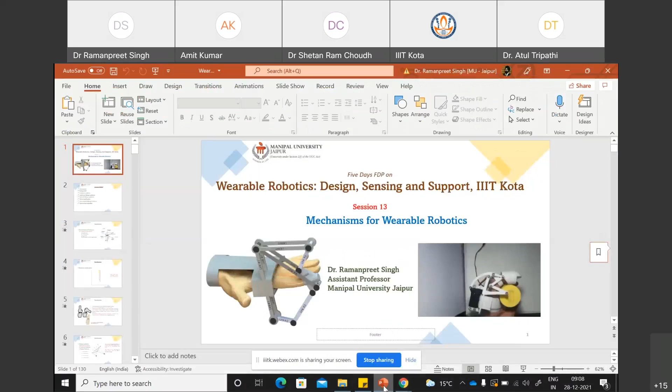Okay, so I think that we are on the fifth day of the wearable robotics design, sensing and support workshop at Triple IT Kota, and if I'm not wrong, this is session number 13.

Before I begin this presentation, I just wanted to share a quote with you guys, because I was reading a book yesterday and I found the quote very touching. So I thought, why not share it with everyone? It may be useful or helpful for you. The quote is like, the tragedy of life is not death, but what we let die inside of us while we live. I found this quote very touching, so I thought of sharing it with you guys.

Okay, so keeping all that aside, I think I should begin now with my presentation. As Dr. Amit has clearly introduced my area of interest, you might be knowing that I'll be going to talk for the next 2 hours or so. I try to maintain the level of this presentation to elementary, and maybe we'll talk about some intermediate and advanced level also, but we'll begin with the elementary level. I hope everyone will be in sync with me during this presentation, and if you guys face any difficulty while I am delivering the talk, you are free to intervene in between.

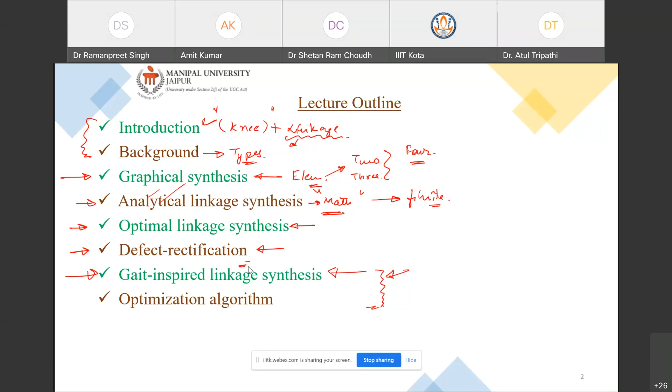Based on time, these two topics, I think, if I get time, I'll try to touch upon them, else we'll stop here. Okay, so I think now I have given you the introduction of what we are going to study in the coming 2 hours.

We'll begin with the introduction. Since our presentation in this lecture is limited to the design of wearable robotics, and my major work is related to the lower limb, specifically the knee, it is very important to understand the biomechanics of the knee joint.

Comprehension of biomechanics is the utmost important thing you should be doing. When I say biomechanics of the knee joint, you must be very clear which plane you are working in. There are three planes: motion can happen in the sagittal plane, transverse plane, and frontal plane.

When I say sagittal plane, it is the plane that divides the human body, or any body, into right and left halves. Any motion happening in that plane is called sagittal plane motion.

My work is restricted to flexion extension motion. Later on I'll tell you what flexion extension motion is. I have not considered internal and external rotation of the knee, or abduction and adduction motions, which happen in the frontal and transverse planes. So my work is limited to this only.

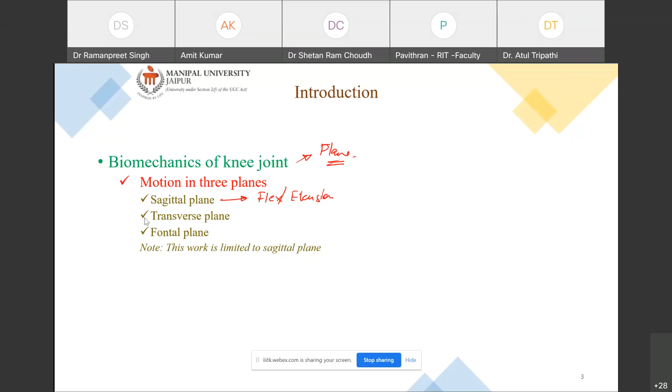I hope I am very clear with the plane description. So this presentation is basically limited to the sagittal plane, and these are the three planes, as you can see.

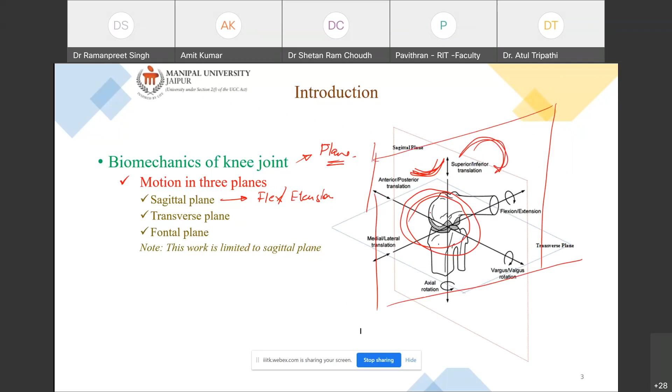This is the sagittal plane, so any motion happening in this plane is your sagittal plane motion. Any motion happening in this plane is your transverse plane motion. And any motion happening in this plane is your frontal plane motion. I hope motion in the three planes is very much clear.

Now I'll show you what kind of motion I was talking about earlier. Suppose this is some wearable device, and we want to visualize what kind of motion is known as flexion extension motion. I'll play an animation so you get a good idea. As you can see, this is flexion, and this is extension. When it moves in this direction, it is flexion, and when it comes back, it is extension.

The entire work will be focused on this, whether I show you slides related to the lower limb or slides related to the finger exoskeleton—whatever body part we are considering, the motion will be limited to the sagittal plane only.

The knee joint allows a wide range of motion for flexion and extension, and this range of motion is pretty significant, which is why I chose this. It is worth understanding the functioning of the knee joint in the sagittal plane—not just what flexion and extension motion is, but how the knee behaves and functions when moving in the sagittal plane. This is equally important. The key motions in the sagittal plane are rolling and gliding.

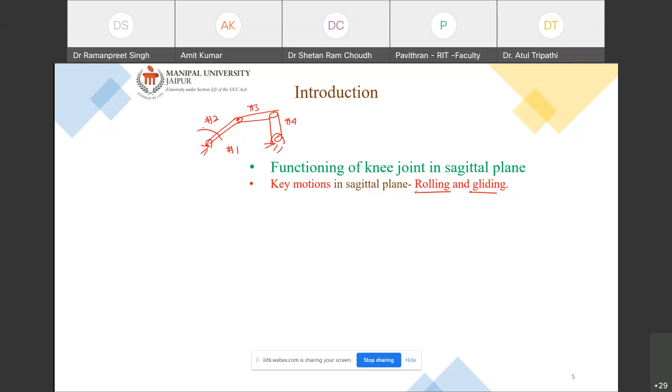The two types of motion we are considering here are rolling and gliding, and there is a mechanism for that. I'll draw that mechanism. This mechanism is called a 4 bar - it has 4 bars: this is the ground link one, this is the second link, this is the third link, and this is the fourth link. When we apply a 4 bar anywhere and give motion to any one link, all the other links will have simultaneous relative motion.

So it will give you a motion which is complex motion, meaning it gives a motion that is a combination of rolling and sliding. That is the motivation for selecting the 4 bar mechanism for getting this rolling and gliding motion.

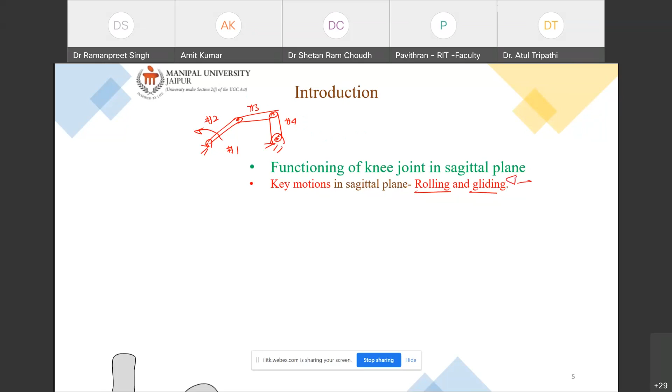This image you can find in one of my research papers, and it is open access - you can go to Journal of Orthopedic Translation, Elsevier, and check that paper. The detailed description of the functioning of the knee joint is placed there, and I have put everything there.

Here rolling and sliding happen simultaneously. If we talk about kinematics now, because our main focus is to mimic the kinematics - these motions are involved, and the kinematics of the knee joint can only be achieved through... no, if I say it can only be achieved through cross 4 bar linkage, it will be wrong.

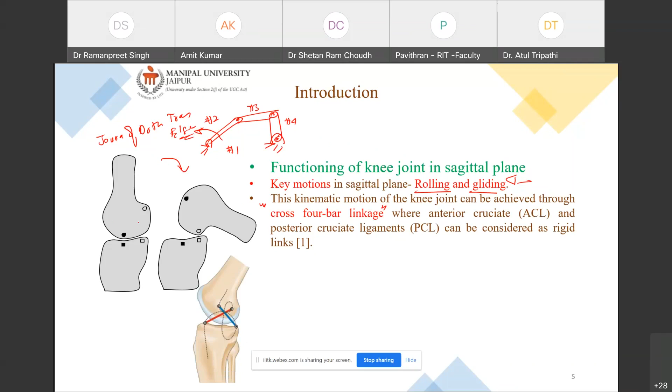It can be achieved through cross 4 bar linkage, because the structure of the knee joint has ligaments - the anterior cruciate ligament and the posterior cruciate ligament. They form a structure similar to a cross 4 bar linkage. So in order to get a motion similar to the knee joint, we can use a single degree of freedom mechanism that can generate rolling and sliding motion simultaneously.

So here a 4 bar allows the combination of rotation and translation, in the sagittal plane. I think this is the best choice. When you begin designing a mechanism, I recommend starting with a 4 bar. Though you can achieve the same motion with a 6 bar also, the simplest method of designing, or the simplest implementation of synthesis methodology, is for the 4 bar. So you can give your try starting with the 4 bar mechanism.

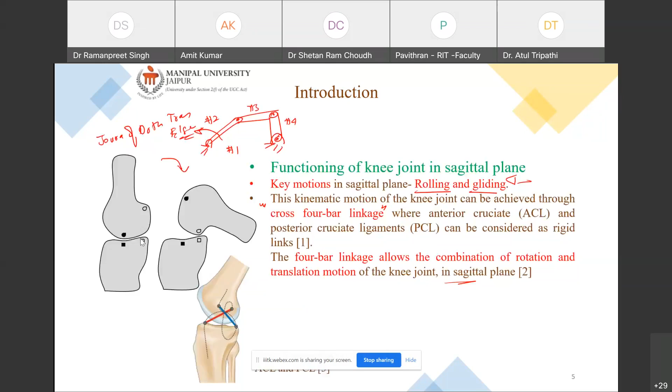I think the brief introduction is done, and now we'll talk about synthesis. When I say linkage synthesis, it involves several methods like graphical synthesis, analytical synthesis, and optimal synthesis. When I say graphical synthesis, a picture should come to your mind that everything will be related to graphs, or we will be doing graphics.

Nowadays there are many softwares you can use - I generally use GeoGebra for graphical synthesis. You can also use AutoCAD, Creo, or any other sketching software to do graphical synthesis. The image I have pasted here is just to give you a visualization of how to do the graphical analysis - we'll be learning it step by step, so don't worry about what I've pasted. I'll explain each and everything. So when I talk about graphical synthesis, everything is related to graphics or drawing.

So the accuracy of it will have some limitations. Because what will happen when you are drawing, suppose you have taken a graph paper and you are trying to draw on that graph paper, definitely you will encounter some errors. And when you encounter any error in any of these steps, that will further amplify, and ultimately you will end up getting a bigger error. So though this method is straightforward and quick, it has limitations.

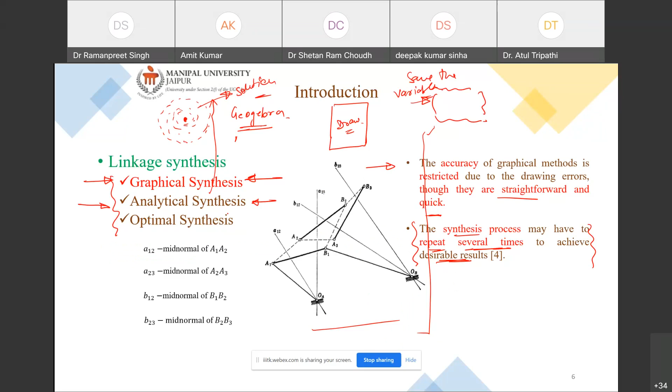Okay, once we are done with the graphical synthesis, then we move on to the analytical synthesis. Once we are done with analytical synthesis, we go to the optimal synthesis. So we started with graphical synthesis and found that there are some limitations, so we move on to the analytical synthesis method. And in analytical synthesis, we need some variables, which we can extract from the graphical synthesis method in some cases. This is my methodology that I follow. You are not bound to follow this.

You can make your guesswork happen, or you can apply some optimization algorithm, and that will work for you. I follow this, and sometimes I also combine optimization algorithms to get my guesswork done. Then in analytical synthesis, I'll give you a brief introduction here, and later we'll try to extract as much information as we can.

So in analytical synthesis, what happens? It works in the form of dyads. Now a dyad is a vector pair. Here we have one body, and here we have a second body. This first body we are denoting by W, and this second body we are denoting by Z. By dyad, I mean suppose we have a 4-bar mechanism like this.

Suppose this is the point, and this is the trajectory which we want to trace. We want a mechanism that can trace this red trajectory. And my proposition is that we can use a 4-bar mechanism, and it can generate a trajectory which is exactly similar to it, and which may overlap with the trajectory which is desired.

Suppose this is my desired trajectory. Now I want a mechanism that can generate a trajectory which can overlap this. So this is the point of interest.

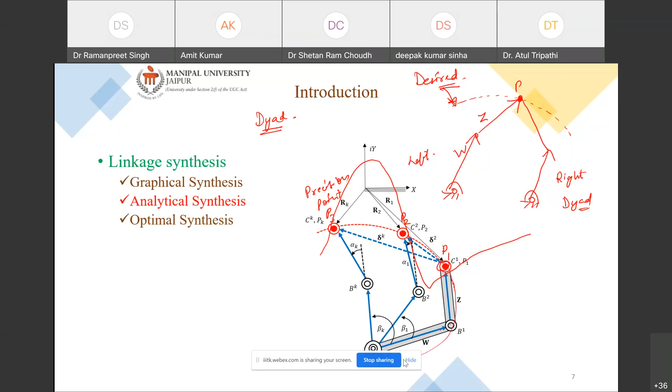So suppose the dyad has moved from here, and it has reached here, and then it has reached here. So what order has it followed? 1, 2, and 3. If so happens, in that case, the synthesis which I have performed is defected, and it is defected by order. There is an order defect, because my sequence should be 1, 2, and then 3. So if that sequence is not followed, we'll say that this mechanism is defected and it is suffering from order defect. So we need to rectify it.

So this is one of the defects which I have covered earlier. Don't worry about such notations and everything, because we'll be covering them in the subsequent slides. The information I wanted to give you guys here, I have already given. So don't worry, now we'll be seeing it in elaboration in later slides.

Now when I say I'm doing analytical synthesis, it also has some limitations. The number of design precision points here cannot be more than 5. And if you are using some different numerical method, then the number of precision points can go up to 9. However, as you increase the number of precision points, you are ultimately increasing your complexity. Your complexity will definitely increase. So try to make things simple, not complex.

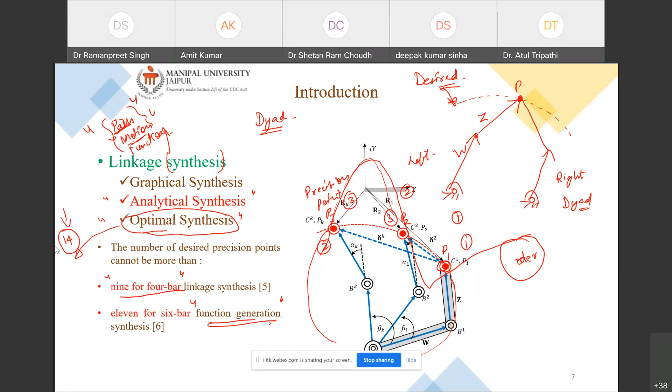Now we will begin with the optimal synthesis methodology. When we are saying optimal synthesis, we can combine it with graphical, analytical, or anything. But when doing optimal synthesis, we should have a mathematical model ready with us.

Now you guys might be thinking how it is possible to combine optimal with graphical. When you are doing graphical, you have to play around with the math which is behind it. Suppose there is a rigid body moving from here to here - you need to find a pole around which the rotation is happening, and you need to create the mathematical model. Then you have to create an objective, and you can minimize or maximize your objective to get things done.

So here I'm taking a very simple example. Suppose this is the trajectory - a closed curve loop - and on this closed curve we have these precision points, and we need to trace all these precision points with some accuracy. Since the number of precision points is more than 9 and 11, we'll go for the optimal synthesis method.

When I say optimal synthesis method, I have categorized it into two parts. The first category is local optimization, and the second category is global optimization. And when I say global, global can be metaphor-less or metaphor-based.

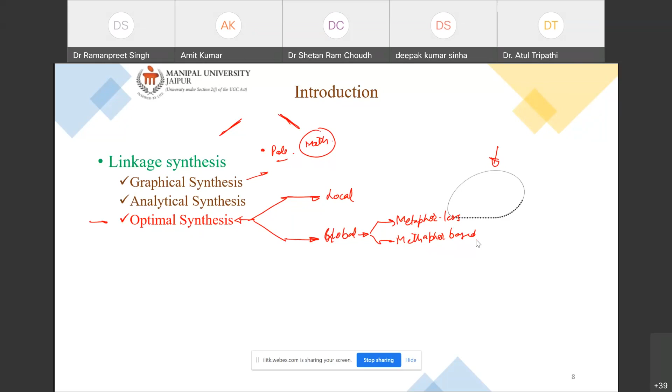This is my classification, though in literature or other research papers you may find different kinds of classifications. But this is the classification which I am following, and I think I will not deviate from it. This is the classification I like, and I think this is the correct one. You are not bound to follow this - you can make use of any classification of your choice, but I like this one.

So optimal synthesis comes in two ways. The first is the local optimization algorithm. When you are applying local optimization algorithm, you have to start with some initial guess solution. So when you start from some guess solution, you will finally end up with a single solution, and whenever you repeat that, you will end up with the same solution again and again.

You do it 100 times, you'll get the same solution 100 times. That means you have a limitation - every time you get the same solution, the search space of that variable has not been exploited. So I find that some lacking of exploitation is there in local optimization algorithm. Due to that, every search area has not been explored as well as exploited. Both things, I don't think, are proper here.

So in that case, you can always go for nature inspired algorithm. When I say nature inspired, that comes in nature metaphor based - so it is nature inspired also. Instead of using local optimization algorithms, you can always choose global optimization algorithms.

Another limitation of the local optimization algorithm is that these basically involve the solution of gradients and Hessians. So when you implement it, sometimes you get entrapped in local optima also. There is a good probability that you may be entrapped in the local optima, and there is a non-zero probability of getting the global optima. So in that case, it is always preferred to go with the global optimization algorithm. Now you can choose it as per your need.

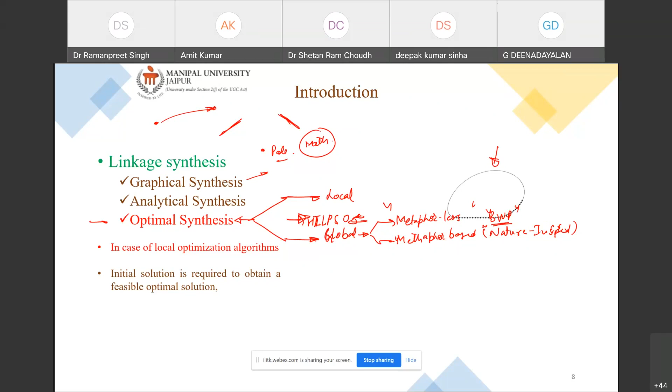You can make use of such algorithms for your analysis. This algorithm is a combination of TLBO and PSO. So when we are not happy with local optimization algorithms, we have a choice to go for global optimization algorithms. In global, we have metaphor-based methods. These days people are only working on metaphor-based algorithms, meaning nature inspired, swarm intelligence, and physics-based algorithms.

There are many algorithms. You might have heard of some like GWO, or GA, genetic algorithm, and PSO, particle swarm optimization. These algorithms are now well established as old algorithms. There are many other newer algorithms being built, so you can make use of such algorithms, or simply check the metaphor-less algorithms.

There are three algorithms which I like the most. One is TLBO, which comes under metaphor-based, and in metaphor-less, one is BWP, which I myself have proposed, and Rao1, Rao2, and Rao3. These are relatively simple to implement, and we do not require any gradients and Hessians. I think much has been said about optimal synthesis.

We'll also try to see this topic in the last part of this presentation if we get time. Nature inspired algorithms are most preferred, as we have already discussed. Now the other modification we can do in nature inspired algorithms is to make them multi-objective. You can make multi-objective in local optimization as well, but in order to reduce your computational effort, you can play around with these algorithms.

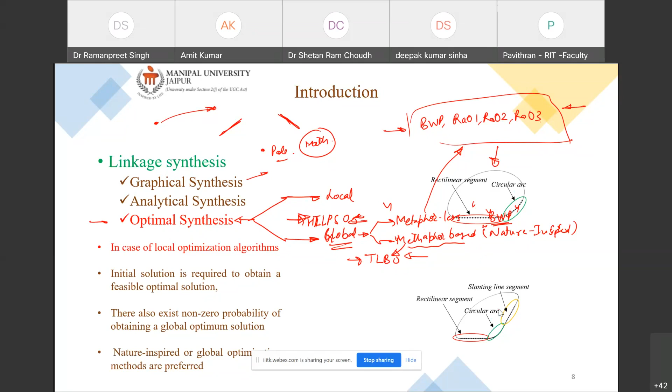These are very handy. Here we have tried to divide it into two parts, so the number of precision points are divided into two parts. This is the rectilinear segment, which we can consider our first objective, and this we can consider a second objective. Likewise, here we have three objectives. Now it is our choice whether we go in stages as per our requirement, or make it multi-objective, in which case we can do Pareto analysis and all.

Now we'll try to look upon the background. Here we'll be discussing the different rehabilitation devices. As per my knowledge, we can categorize the rehabilitation devices into these many types.

The first one is the treadmill-based exoskeletons. As the name says, it is based on treadmill. So those devices where we make use of a treadmill are considered treadmill-based devices. There is one limitation: we have to use a body weight support system also in treadmill-based devices. I'll give you an example.

These are some of the treadmill-based exoskeletons or devices which I have found. The first one is the robotic orthosis of University of Auckland. Here you can see that our main focus will be on the knee. See what kind of joint is here, here, and here. When we look upon treadmill-based devices and exoskeletons, you may find that people are using a single axis joint for the knee joint.

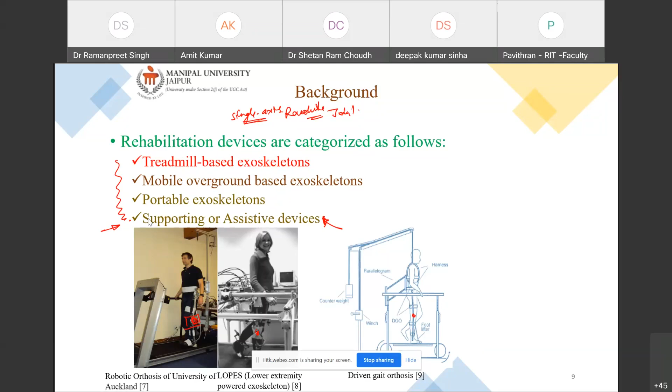Now let's see the advantages and disadvantages. As you can see, it involves multi-degree of freedom. The entire exoskeleton involves multi-degree of freedom, which may hamper your productivity because you are going to design it, and it makes things complex. So we have to keep the degrees of freedom which we are comfortable playing around with.

We saw that they use a single axis revolute knee joint, which allows only rotational motion, but we have to consider sliding motion as well. So in that case, we have to move on from a single axis revolute joint to a new joint that covers both rotation and sliding motion.

Then there are several other mechanisms, like the UCI gait mechanism and NJIT gait rehabilitation system. They have 1 degree of freedom with 6-bar and 4-bar linkages. However, when they applied a linkage mechanism, they applied it for the entire lower limb. They have not only covered the knee joint, they have covered the entire lower limb.

So these are the things which I found out, and these are to be updated. Now you can again explore this area, and you may find several other things which I have not found.

Now the other limitation is that, as you can see from these pictures, these devices are really bulky and it is not comfortable for a normal human being. Or you can say, not wealthy human beings cannot buy them because these are also expensive, and you have to go to hospitals if you want to access them.

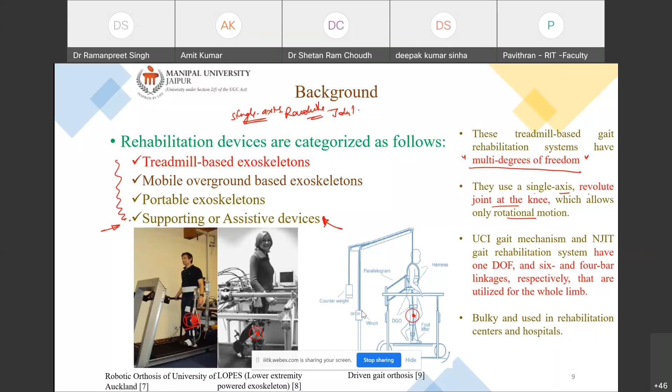The second category is mobile overground based exoskeletons. As the word itself says, it is mobile, so it is going to move. Some ambulation is going to be there, and overground means your exoskeleton is going to move along with you on the ground. So who is going to move it? The person or patient who is going to use that exoskeleton is going to move it on the ground. Such kinds of exoskeletons are covered under this category, mobile overground based exoskeletons.

So in such cases, they do not require a body weight support system because you are already carrying an exoskeleton, so that is supporting you. There is no need for an extensive body weight support system.

So in these exoskeletons also, you may find that people have applied a linkage mechanism. This is a linkage, and near this foot they have applied a forward actuation. This is for the actuation, and this is one link here, and this is another link here. So it's basically a linkage mechanism that takes care of a person who is walking, or the person who is carrying that support system, the exoskeleton, along with him.

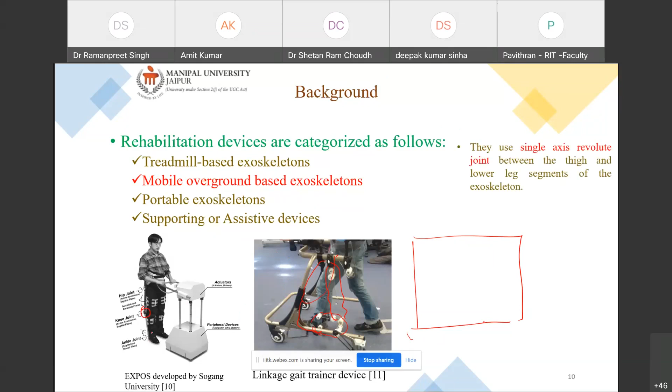Let's see, there are also some limitations here. People are using a single axis revolute joint for articulation between the thigh and leg segment, and some exoskeletons are using linkage mechanisms. However, these are for actuation of the entire lower limb, not at the knee specifically. So this area is still free.

When you are designing this, you should have some trajectory. Getting the trajectory, and deciding what trajectory you are planning to design for, is very important. I have found that people are using the teardrop trajectory.

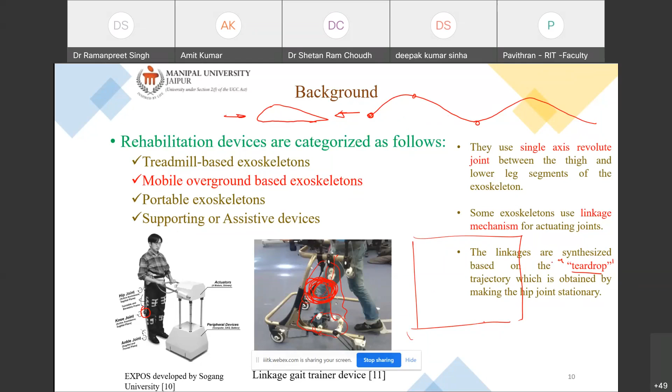Now the other exoskeleton category is the portable exoskeleton. As the word itself says, it is portable, so now you are good to go, take it to your home. Any person or patient can now carry it home and make use of it.

Again, they are also using the same single axis knee joint. So everywhere you may find that everybody is using a single axis revolute knee joint, and some people are also applying it, but in robots they have applied it. For normal human beings and wearable orthotic devices, assistive and supportive devices, people have not used that in old papers. I have not found any.

Now you may find that people are also applying mechanisms here. It is observed that a revolute joint is used to articulate the thigh segment and leg segment. But it is equally important to understand the role of femur and tibia, because we need to check how the rotation is happening and what trajectory the knee joint is generating, and based on that trajectory we need to synthesize a mechanism for that knee joint.

So the exoskeletons reported in this section have multiple degrees of freedom. However, only PGO, the powered gait orthosis, is found to have a single degree of freedom for actuating hip and knee joints simultaneously. So it is a single degree of freedom mechanism which simultaneously actuates two joints. This kind of mechanism can be used, and we can modify such a mechanism as per our need.

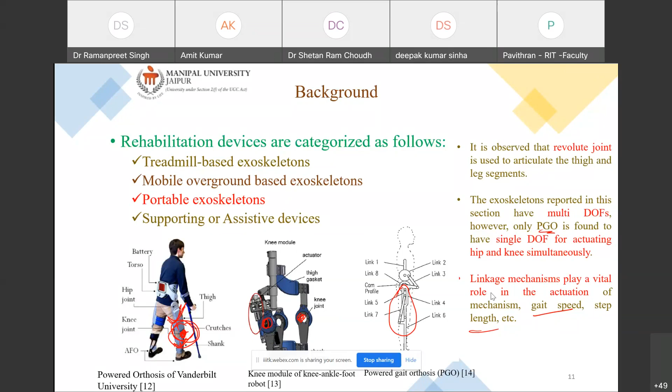As we have understood, linkage mechanisms play a vital role in actuation, and we can play around with gait speed, step length, and anything you want when applying linkage mechanisms. So it is always better to use a mechanism instead of simply creating a device for generating actuation. You can always use a mechanism and then combine it with the actuation, motor, or controller you want to apply. So the first step is to create a mechanism and then apply the controller and actuation.

Last is supporting or active assistive devices. Here you can see people are using these gears which give you the motion. But again, that is also not sufficient. I don't think it is sufficient.

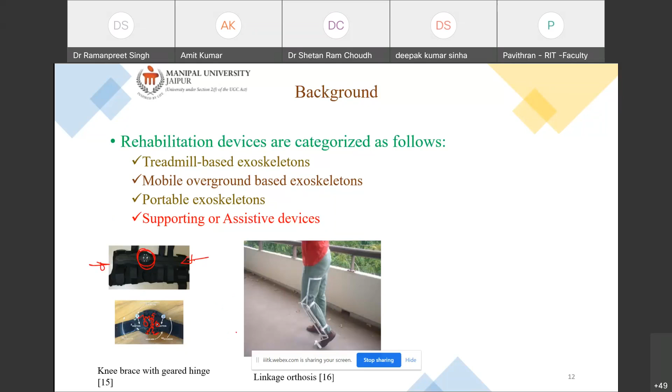People are still using it, and you may find this kind of device in markets. This is a wearable orthotic device, and I've pasted a photo of my device here. People are also using linkage mechanisms, where the actuation is for the knee and foot simultaneously.

It is observed that single axis joint gear and cam mechanisms are normally used at the knee joint of assistive devices, and the knee and ankle movements are coupled through linkage mechanisms. Considering this background, it is equally important to investigate linkage mechanisms used in walking robots, since we are more interested in walking.

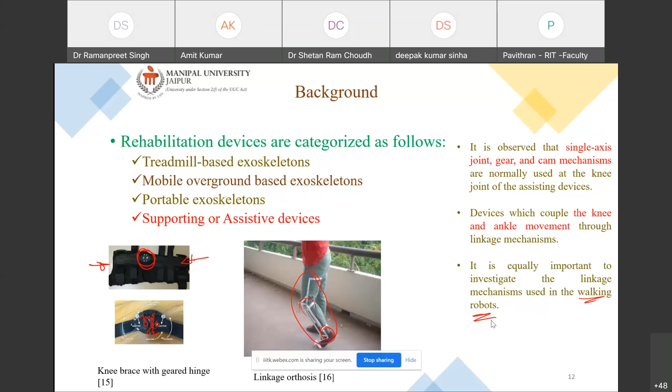We need to also check, apart from these rehabilitation devices developed for humans, the area of walking robots, to see how they are creating walk. For that, I found the most common one, which you may find on the internet, the Theo Jansen linkage mechanism, also known as the wind beast.

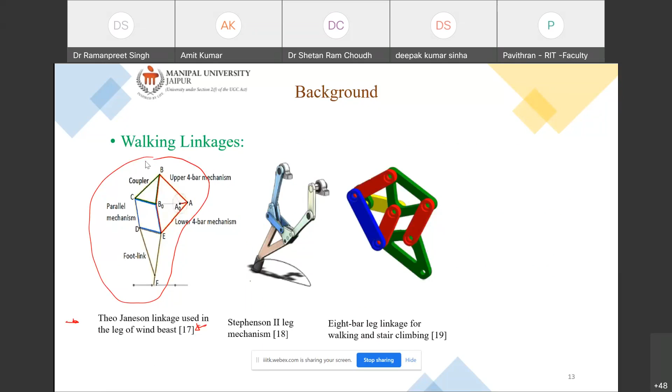So the structure of this mechanism - this is the lower leg, or lower and upper leg combined. It's an entire mechanism that gives you the motion for the entire lower limb. This is the Stephenson two-leg mechanism, again an entire mechanism giving the motion. And for the eight-bar mechanism also, you have an entire mechanism giving the motion.

At the start of this presentation, I made it clear that my focus will be entirely on the knee region, because I found it interesting how to give motion which is rotation and sliding and rotation simultaneously to the knee joint. For that, I found you can make use of 4-bar, 6-bar, 8-bar mechanisms at the knee instead of going for the full leg mechanism.

Now it is our liberty to go with any of the trajectories we have. You can use the teardrop ankle trajectory, or go with any natural and assumed trajectories, making use of clinical gait analysis data books to get trajectories from there. Instead, you can do motion analysis using a motion capture camera, do experimentation, and extract trajectories from there itself.

I'll tell you the way to extract trajectories using experimentation, which we are following - I don't know whether other people are following it, but I'll try to disclose that here. This is the teardrop trajectory which you can use. So many trajectories are taken experimentally, and later an average trajectory can be used for designing a mechanism.

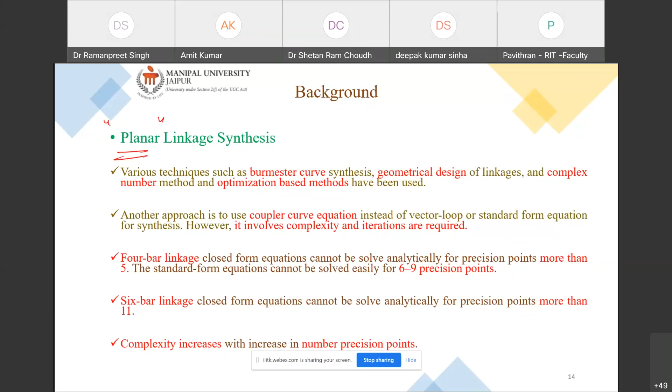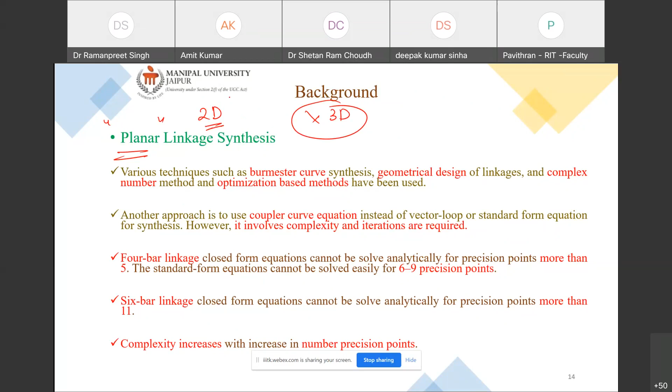I think we are very much done with the background of rehabilitation devices. Now we can proceed to understanding the background of the planar linkage synthesis method. When we say planar, that means my focus will only be on 2D - we'll not touch upon 3D mechanisms, only 2D. The reason is we are working in the sagittal plane, trying to cover only the flexion-extension trajectory.

There are various techniques such as graphical technique, analytical technique, and optimization based techniques. You can further classify them - there is one technique known as the Burmester curve synthesis method, which you can use when you have 4 or 5 precision points. You can also go with geometrical design of the linkages, and the one I like the most is the complex number method, which you can combine with optimization based methodologies.

So what we can do is make use of this equation. We can create this equation for this coupler curve and use it to do the synthesis. That is another method, but it requires many iterations and the complexity is huge.

4-bar linkage synthesis closed form equations can be used for analytical synthesis, but it should not be more than 5 precision points. We use the standard form of equation for that, and it cannot be solved easily for 6 to 9 precision points.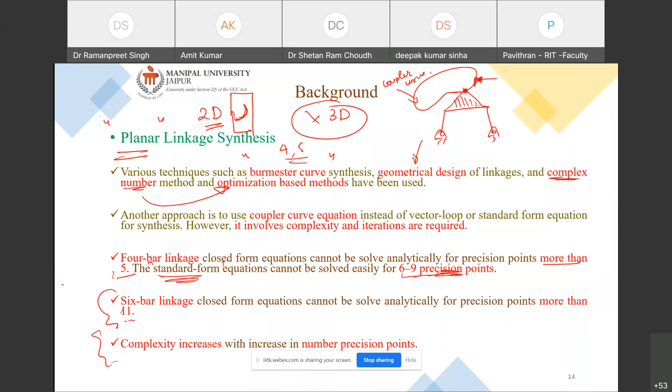Now, if you are doing optimal linkage synthesis, you should make sure that if you are doing optimization, you should have one objective. When I say you should have this, when we are doing optimal linkage synthesis, by default I am assuming that you will be making use of one algorithm.

You have an algorithm with you, right? So we are only interested in the objective and constraint. Constraint as per your problem, objective as per your problem, and algorithm by default. I am considering that if you are applying an optimization algorithm, you have one or more algorithms available for applying.

So there are two important things you should take care of: one is the objective function, and the other is the constraint. Make use of these two things and do your work, and you are good to go, because for the algorithm, I think you already have it and can apply it to get your objective achieved.

Now when I'm saying objective, there are many objectives readily available for you. Even I have used a Euclidean distance objective function, where suppose we have an objective trajectory which I want to track, and my mechanism is generating this trajectory.

So what will happen? There are some points, suppose 3 points only. I'll measure the distance between these points. So I can make an objective. We know the distance formula: x1, y1...

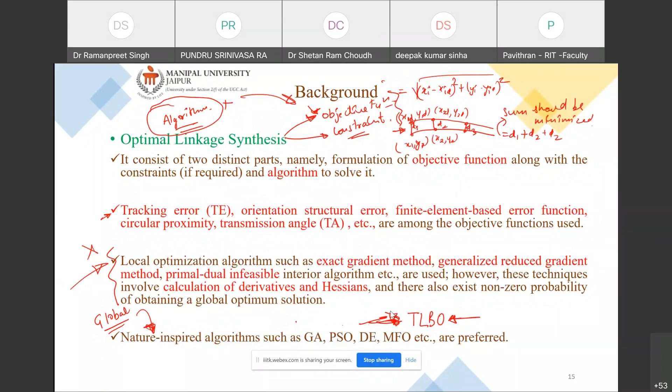Now we'll talk about defects, because while doing linkage synthesis and applying any optimal synthesis methodology, in certain cases you will encounter some defects. The best thing is to rectify them. So how do we rectify these defects? First, we identify them. There are three kinds of defects I have identified: circuit, branch, and order. I call them CBO defects.

When I say circuit, we can explain it this way: we have a 4-bar mechanism, and when you do position analysis of any 4-bar mechanism, you encounter a quadratic equation. A quadratic equation has 2 roots, so corresponding to each root you get one 4-bar mechanism. So two different 4-bar mechanisms are possible. Corresponding to each mechanism you get one trajectory or coupler curve, and that coupler curve may be called one circuit.

Suppose there are 3 design points: D1, D2, and D3. If you have 3 design points and 2 circuits, and our mechanism is capable of tracing all the design points on one circuit, our mechanism is completely defect free. But here, this red one is circuit 1 and the other is circuit 2. One design position, D3, lies on circuit 2, and the other two positions lie on circuit 1. That makes the mechanism not useful because it is not tracing all points.

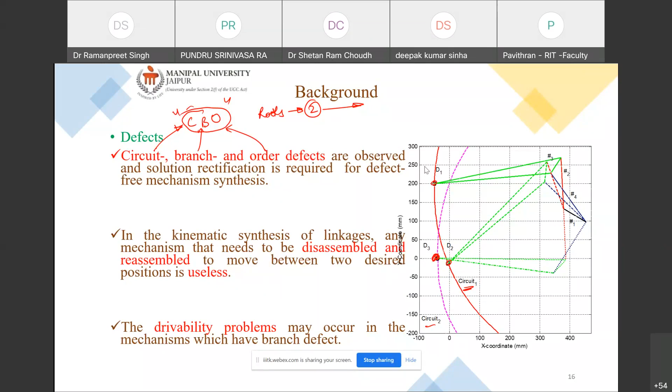These are some procedures for rectifying circuit defects - they can be eliminated through graphical and optimal synthesis techniques. Filemon's graphical procedure and Waldron's three circle diagram can be used to see whether you can remove the defects. You can refer to the Russell and Sodhi book for a better understanding of Filemon's graphical procedure and Waldron's three circle diagram to remove circuit defects.

However, the method I follow is simply this: first identify whether the defect is present or not. If the defect is present, we need to rectify it by creating a constraint to address that particular defect. This is the technique we follow. It is observed that defects can be avoided by identifying and applying a constraint for each cause of the defect.

So we'll be following this methodology that will make things really simple. And there's another method which I also found okay, it's handy, but sometimes it is difficult.

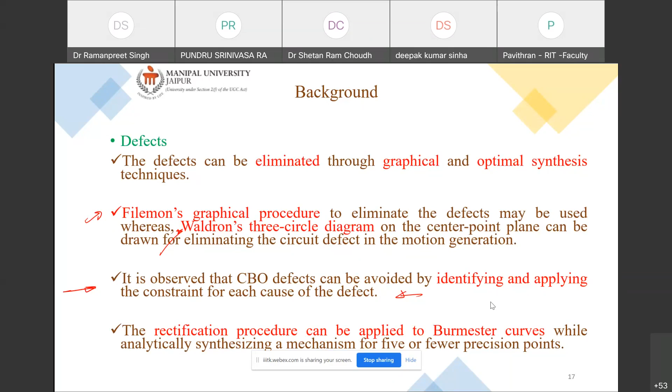Because it involves maximum number of iterations. So here, on the Burmester curve we need to identify which segment is giving you the circuit defect. Once we've identified the segment, we can remove it and we are good to go. So it's not as easy as I've said.

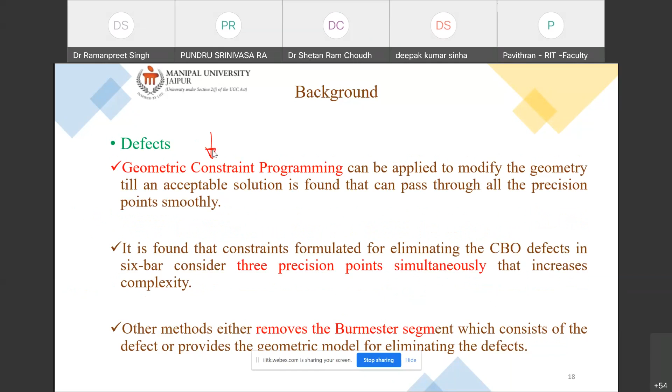It involves a lot of mathematical and algebra work. So other methods either remove the Burmester segment which consists of the defects, or provide a geometrical model for eliminating the defect. You can make use of geometric constraint programming in order to remove or rectify these defects. I think now it's 10:12 and we have only covered introduction and background.

So now this is the start of your synthesis. If you have not kept a notepad and pen with you, it will be difficult, because it is very simple. Just make use of a notepad and pen, and whatever I am explaining here, just try to note it down.

So we are now trying to synthesize a 4-bar mechanism for 2 precision points. This is more like a motion generation method, so we are making use of motion generation. When I say motion generation, that means what is the given information? Given information is the rigid body orientation, rigid body location and orientation.

So here we have, the problem is: we need to design a 4-bar mechanism. Graphically it is very easy, so please be in sync with me. Design a 4-bar mechanism graphically for given rigid body location and orientation.

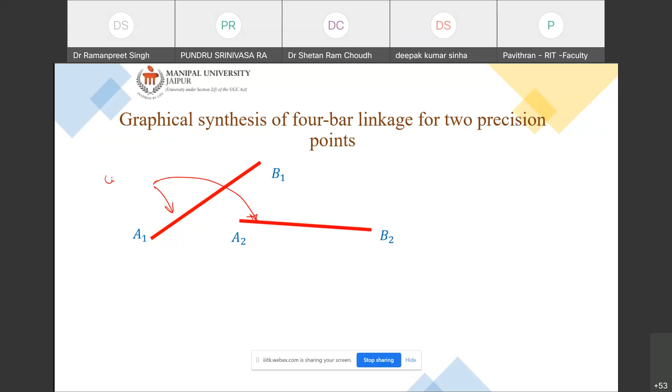Now, in order to synthesize a 4-bar mechanism graphically, the first step is to start from here and see your A1 has moved to this new location A2. So draw a line between them, draw a line between B1 and B2. Once you've drawn the lines between A1, A2, B1, B2, now you need to draw the perpendicular bisectors.

Perpendicular bisector of A1, A2, and this is the perpendicular bisector of B1, B2. Ultimately, you will get this pole. This will be a pole, and around this axis rotation is happening, as you can see that around this your rigid body is moving. The rotation is happening in this direction, so this is the pole around which your body is moving.

So now we need to identify the pivots, which is the ground pivot and which one is the moving pivot. Moving pivots are already available here. Now we need to identify the ground pivots.

So I'll just make a 4-bar structure here. We need a mechanism like this: A0, A1, B1 and B0. Now we are interested in locating A0 and B0 in order to complete a 4-bar mechanism. We are given the two locations and orientations of the body A1, A2, B1, B2. Now we are interested in locating this.

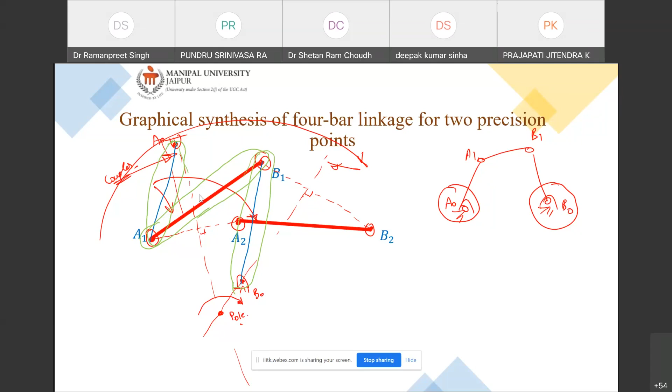Okay, so what is the first step? First step is distance between the two, A1, A2. Then distance between B1, B2. Draw perpendicular bisectors. You will get a pole. So once you are done with this, you will get a pole.

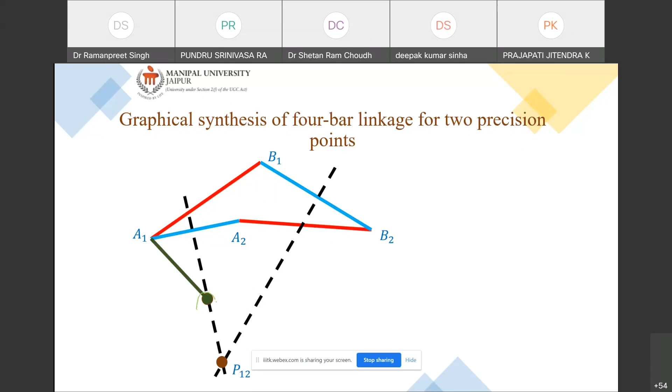Once you have found the pole, then anywhere on this perpendicular bisector, you can select the ground pivot. So this is my ground pivot here. Okay, so see how the rotation is happening. And then on this perpendicular bisector, there is another ground pivot around which your B1 is moving to B2.

So this is the final, after doing the graphical synthesis, this is the final 4-bar mechanism which I have come up with. This is my link number 2, because we always say that ground is link number 1. This is link number 3. This is link number 4. See, so now you can see how it is moving.

So I hope we are done with graphical linkage synthesis of motion generation for 2 precision points. Up till here, any issues in understanding anything, or shall I proceed?

If there are no issues, we can proceed to doing the 3 precision position synthesis considering motion generation. Now earlier we have only 2 precision positions. Now we have 3 precision positions. So the given information is, the problem is given to you in the form of positions and orientations of the rigid links. So here positions are given for A1, A2 and A3.

B1, B2, B3 is given to us. And what else is given? Orientations. The angular orientations are also given: theta 1, theta 2, theta 3. So angular orientations and positions are given to us.

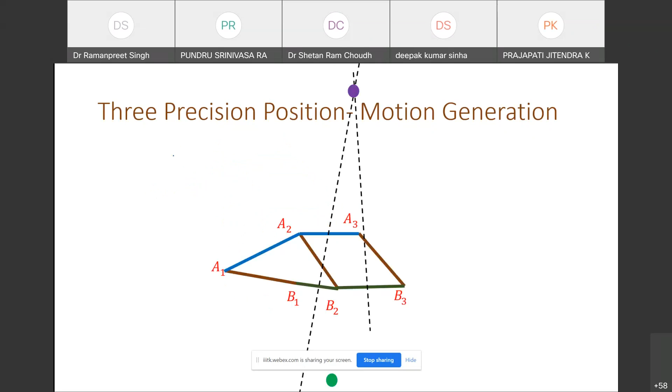So we have two pivots, the green pivot and the purple pivot, and both these pivots are the ground pivots. Now we can join them with our lines. This is our A0 and this is our B0. Join them, and this is the 4-bar which we are interested in getting. So now you can see the 4-bar can move to these locations.

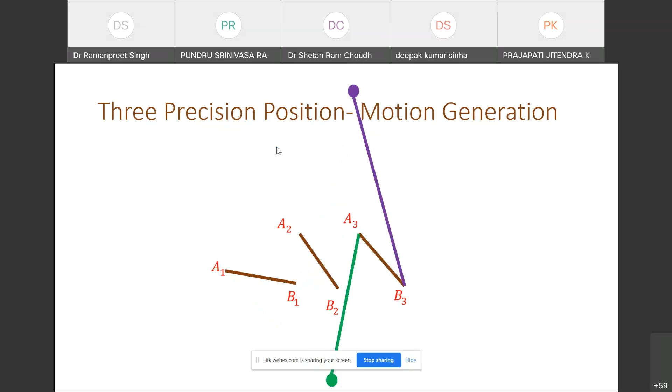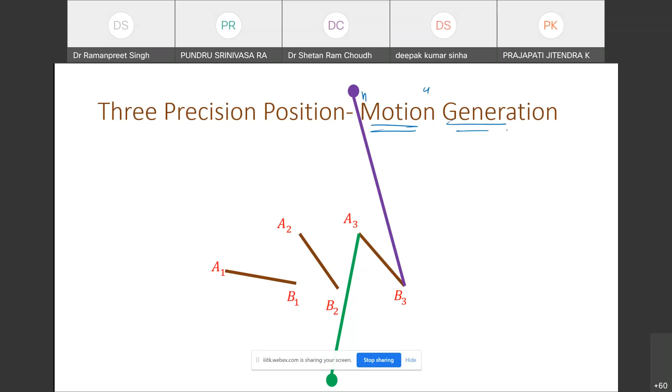Okay, I hope you have understood the method of graphical synthesis for motion generation. Mind it, it is not path generation. Both these methods are motion generation. So in graphical, I have covered only motion generation, not path generation.

So I think that you guys are comfortable understanding the graphical motion synthesis, since the topic is very vast and I tried to skip many things. However, I also tried to cover up many things, but yeah, we cannot cover the entire thing in a 2 hour lecture, but I'll try my best to show all my work.

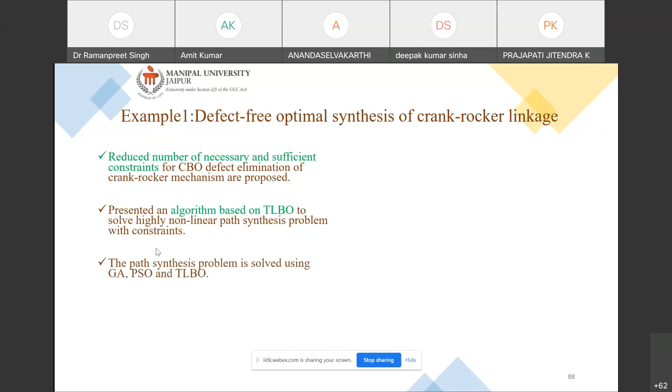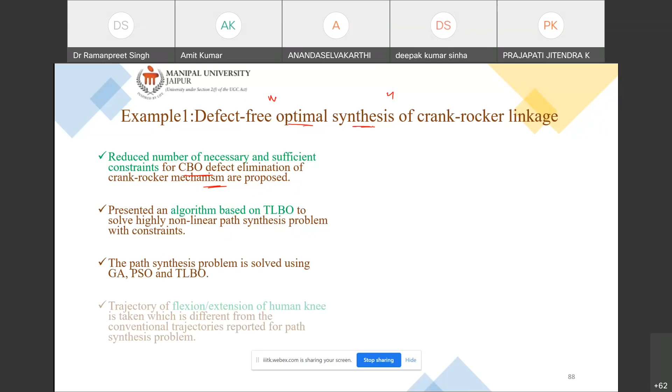Okay, now I'll show you the method of creation. In this work, what we have done is tried to remove all the defects, and we have come up with the necessary and reduced number of constraints for defect elimination, and we have done optimal synthesis. So while doing optimal synthesis, instead of doing all the extra work, we have simply done the position analysis. Position analysis you can find in any simple book, because we always try to keep things simple. So do the position analysis.

When you are doing the position analysis, what you will be needing is the position of this point, and you can simply create the position like this. Ultimately you will be starting with some reference point, this is some reference frame. You have to move on to the starting point or the ground pivot, so this is your first vector. I have marked this position to be O2x, then R2 cos of theta 2, which is this, then L cos of theta 3 plus beta.

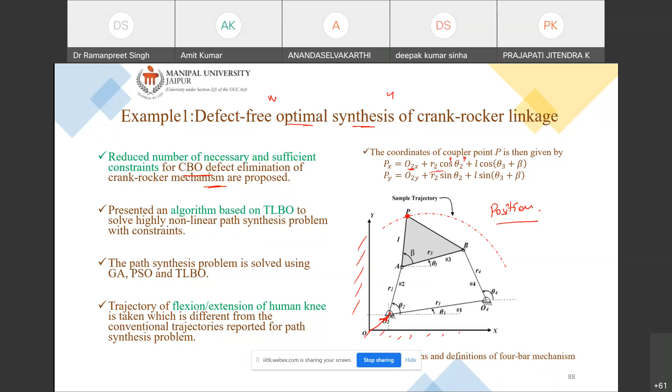Now we have some of the variables given to us, and some variables which are not given to us. The given variables are, we have to assume what theta 2 is going to be. Since I mentioned we are going to use a crank rocker mechanism, that means our crank is going to move from 0 degrees to 360 degrees. So we have to design a mechanism in which any one of the links is capable of making such a rotation. So do the position analysis, find the x and y coordinates, px and py, and what is given to you.

Since we are interested in getting a trajectory, we should have desired points, pxd and pyd, which are the desired coordinates. If you have done the experimentation and know how the knee trajectory is, that trajectory will be considered as your desired trajectory. You can make use of that desired trajectory and do the position analysis to get the obtained trajectory, so px and py will be your obtained trajectory.

Now the big question is, what is the value of R2, L, and all the other variables? These are the things which we do not know. So in such a case, what will happen? We'll create an objective function.

My objective function will be px, the distance function. I have two trajectories like this, and I want to minimize the sum of these distances d1 plus d2 plus d3. So I'll create the function for this trajectory, which is px and py, and these are the points already given to me: pxd, pyd, pxd, pyd, pxd, pyd. I'll use the distance formula which I have written here.

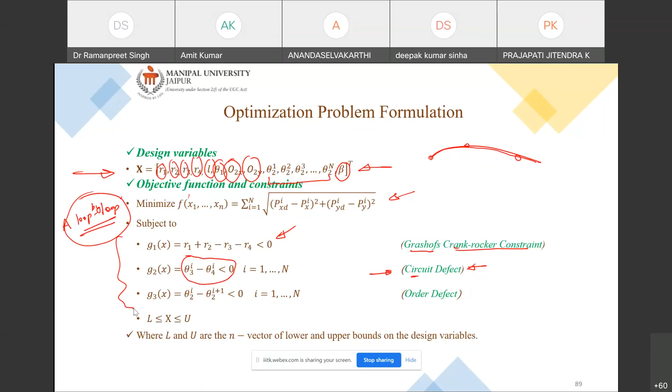So in this fashion, we are applying the optimization algorithm, and we have modified the TLBO for reducing the computational effort. Since you are working on a non-linear optimization problem, it will take a huge amount of computational effort. So in order to reduce that, we put a refinement scheme for TLBO. It will check all the solutions, or all the constraints, before moving further. It will check these constraints, and the solutions which are violating them will be removed, then it will update the new solutions and move further. So this is the only part which we have edited in the TLBO algorithm, just to reduce the computational effort, and we found that it worked absolutely fine. So you can make use of it.

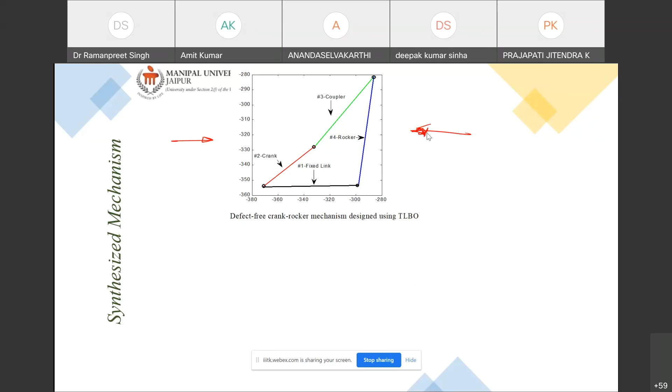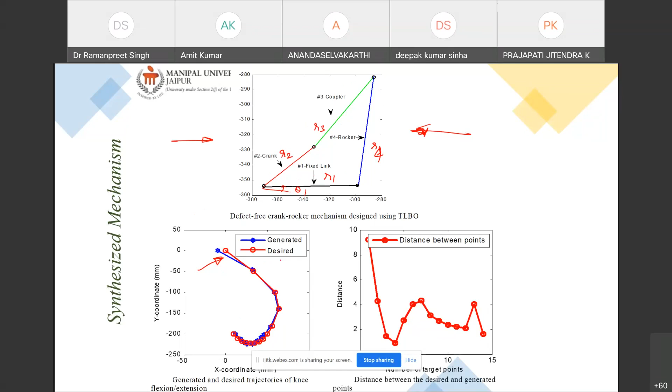So this is finally, after doing all that work, the result that we got. This is the 4-bar mechanism that we have obtained. Now you can easily visualize what I was trying to convey earlier - this blue trajectory is the generated trajectory. When I say I have designed or synthesized a mechanism, that means I found what should be the value of R2, R3, R4 and R1, and what should be the value of theta1. So considering these values, when I tried to generate a coupler curve, I found that the shape of that curve is like this, and what is desired is the red one. It is exactly similar to the one which I desire.

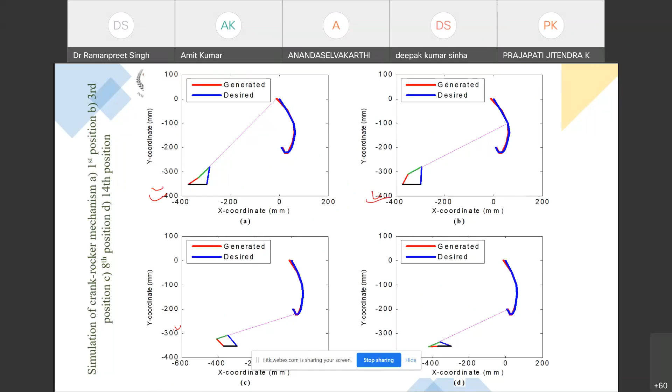So this way, when we tried to validate it through simulation, we found that it is tracking all the trajectories and there is no defect also. These are the different positions and orientations of the mechanism at different points - the first position, this is the third position, this is the 8th position, and this is the 14th position. So it has covered all the points.

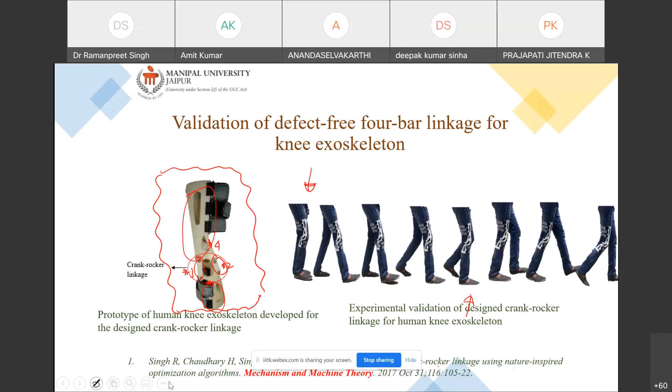So now I think we can move on again to the analytical synthesis methodology, and we'll cover that up. I hope we are at the right pace and everybody is in sync with me. So shall we start analytical synthesis now?

Okay, so is there any limitation that nobody should respond during the presentation? Is there any limitation? I just wanted to make sure that you guys are listening.

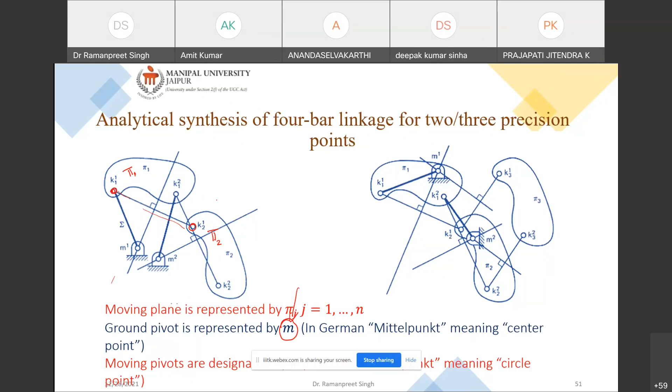When I say ground pivot, we'll always refer to M, because in German, Mittelpunkt means center point, which is grounded. So whenever we refer to the ground point, we'll use M. And whenever we refer to the moving point, we'll use K, Kreispunkt.

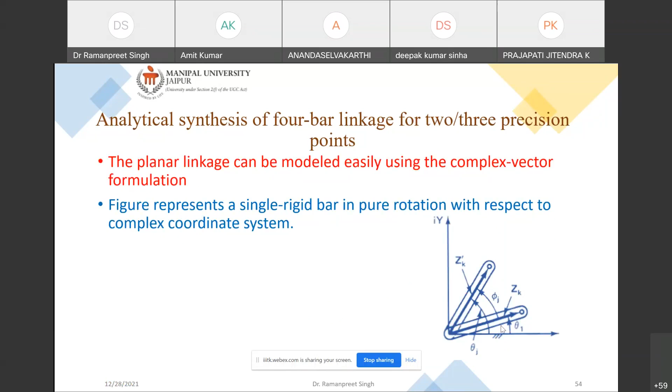So the planar linkage can be modeled easily using the complex vector formulation. Here we have a figure where we have one rigid body oriented at an angle of θ1, and it has later moved to another point. So we have to apply a rotational operator here.

So when we apply the rotational operator, it indicates that your rigid body has moved from its initial position to the new position after rotation, rotation of φj. So whenever we need to rotate the body, we apply the rotational operator.

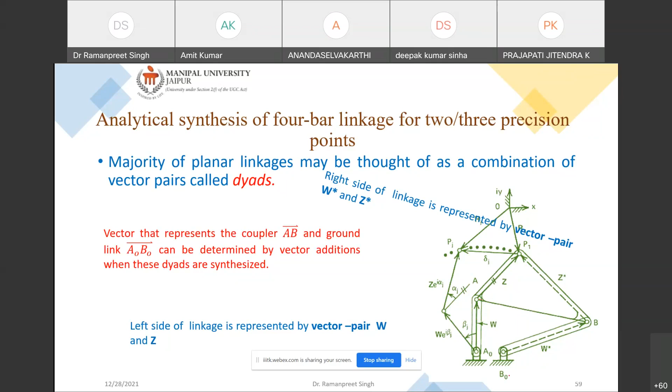Whenever the problem is given to you, the points will always be mentioned - these points P1 to Pj, what are the points? These will be given in the problem. This is nothing but the desired trajectory, which is always given to you.

So we have a reference frame, and with that reference frame, we know the position and orientation, or the coordinates of that point. These are represented by R1 and Rj. If we know R1 and Rj, we can easily determine the distance between them using the vector addition method. So we can write R1 plus delta j is equal to Rj, or simply delta j is equal to Rj minus R1.

Now instead of considering the entire 4-bar, we do synthesis in steps. First we do synthesis of the left dyad, and then we move on to synthesizing the right dyad. So we have a left dyad here, and it has moved from its initial position to an angle beta 2, and later from its initial position to an angle beta 3. The same situation applies for Z.

Same situation goes for Z. So here, this is the initial configuration. What we'll do is draw a line parallel to this, so these two lines are parallel. From this initial position, it has moved to alpha 2, and from this initial position, it has moved to alpha 3. So these are the two, for 3 precision points, these are the notations. When I refer to alpha, I mean Z orientation, Z rotation. And when I refer to beta, I mean W rotation.

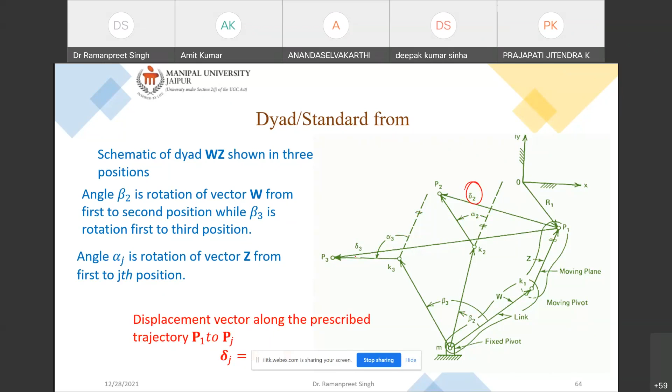Now, for the displacement vector, I have already discussed how to determine delta 2, delta 3. I have already explained this, and since it is not visible over here, you can just move on to the previous slides. I have written it there.

Then we'll start with the 2-point synthesis. The basic method for synthesizing a mechanism is that some things are given to you and some things are to be obtained. So here what is given to you is alpha. Since we are doing motion synthesis, alpha has to be given to you. Alpha means the rigid body orientation and position. So R1 and R2 indicate the positions, and suppose A1, the position of A1 is given to you, and the angle of orientation is also given to you.

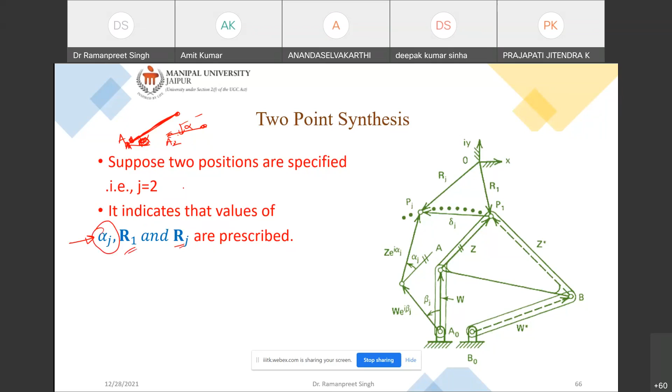How much angle it has moved from here to this will be given to you. So this alpha will be given to you, not this alpha, not this alpha. Suppose this is A2, this is A1. So moving from A1 to A2, how much it has oriented, how much it has rotated, that will be given to you in the form of alpha, and the location is also given. A1 and A2 is always given to you. So these are prescribed values, and everything else apart from this we need to find out.

Since we are working in the form of dyads, to find the unknown starting position, the vector dyad is WZ.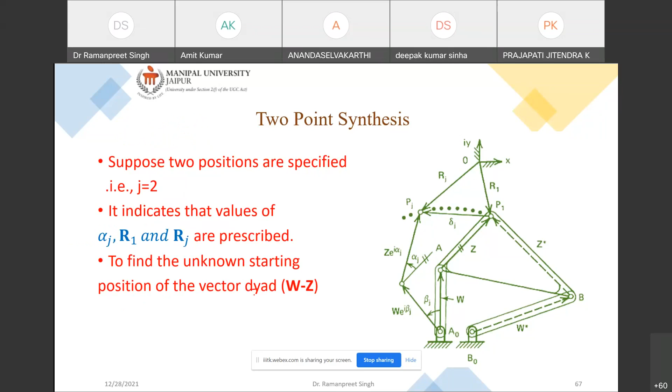So now we have understood what the rotational operator is. We are starting from the first point and heading towards the last point, PJ. So this is our W vector, this is Z vector, and this is delta J vector. Now the arrows will make everything clear, showing that it is forming a loop. While moving from P1 to P2, it is making a loop. So we have to do the vector addition.

First of all, we'll write this vector. This vector has rotated by an angle of beta from its initial position, so we'll write it as W vector into the rotational operator, which is e to the power iota beta j. Similarly, we'll write it for Z, which will be Z vector into e to the power iota alpha j.

Once we are done with these two things, we need to check what the displacement vector is. This is the displacement vector. However, you can see that now we are moving in this direction, which is negative to this, the opposite direction. So we have to put a negative sign now, negative of the displacement vector. Now again we are moving in the opposite direction, so negative of this, now again negative of this. So it is a closed loop, and that is why it is equal to 0.

Now we can simplify this. When you simplify this, you can take W vector to be common and you will get this. This is the final equation. Now you can put the value of J to be 2 for 2 precision points, 3 for 3 precision points, and N for N precision points. And delta J is already given to you.

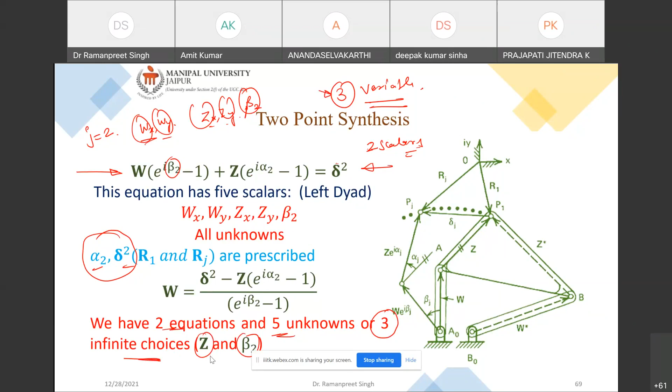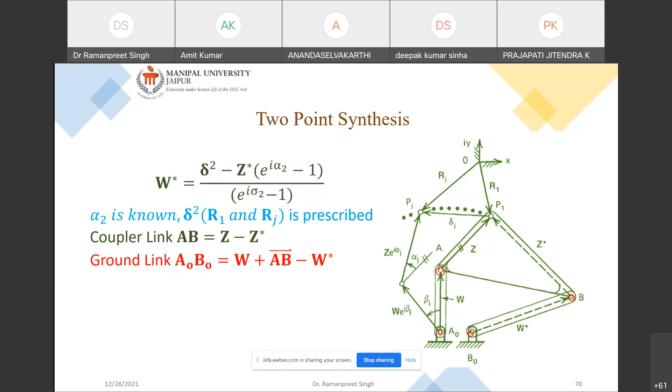So a similar methodology we can follow for W star and Z star. Once we are done finding W star and Z star, then we can easily do vector addition, and find what is the length between AB and A naught B naught. Z minus Z star will give you this, simply by doing vector addition.

So you can make use of the arrows here and find your AB and A naught B naught. Once done, this is a general slide for motion generation. Suppose you increase the value of J to J3, in that case the number of scalar equations will increase to 4, because there will be 2 loops, and 2 loops means 2 vector equations. 2 vector equations means 4 scalar equations. So how many variables will you have? You will have 6 variables.

5 variables were there before, and now one more variable has been added, which is beta 3. So how many choices are there now? Now we have only 2 choices, because the number of infinite choices decreases as the number of equations increases. Similarly, if you increase J equal to 4 and J equal to 5, the number of equations will keep increasing and the number of free choices will keep decreasing.

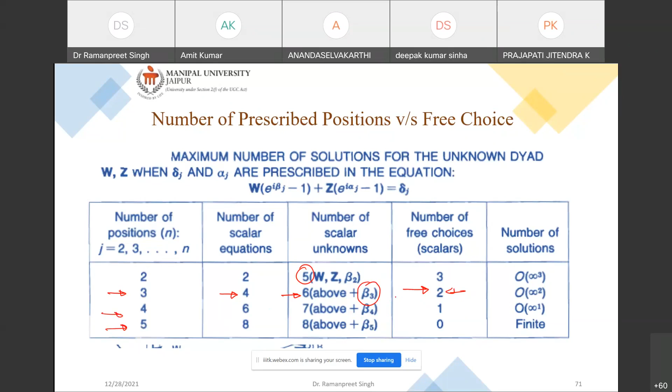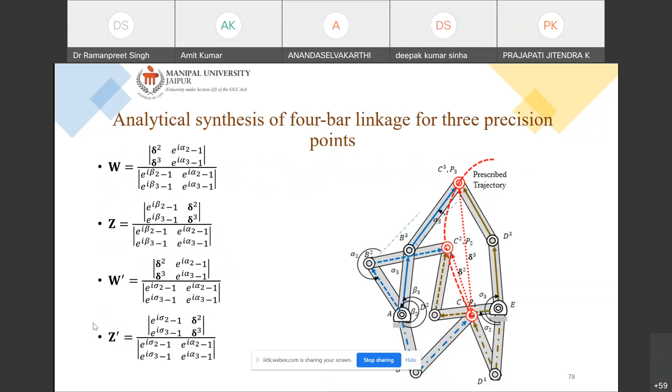Once you have found all the lengths, then you can find the points also. Then you can find the point A naught. What are the points? This is your point A naught, this is point A, and likewise you can find any of the points. B is the point for the right one, B naught.

So I'll just show you this example and then we'll wind up this presentation. So, analytical synthesis of a 4-bar linkage for 3 precision points. Suppose this is the thing which is given to you. R1 is given, R2 is given, and R3 is given. So we are taking an example of 3 precision points, meaning the distance between R1 and R2 will be delta 2, and R1 and R3 will be delta 3.

So we have found what delta 2 is and what delta 3 is, and this is given to you. This is given information, since I taught you motion generation, so consider this to be given for motion generation. These are not randomly selected values; the randomly selected ones are these.

So here we have to randomly select 2 values, which are beta 2 and beta 3. We have randomly selected these for one dyad, and sigma 2 and sigma 3 for the right dyad. These are the counterpart of beta for the right dyad, only the notation is different.

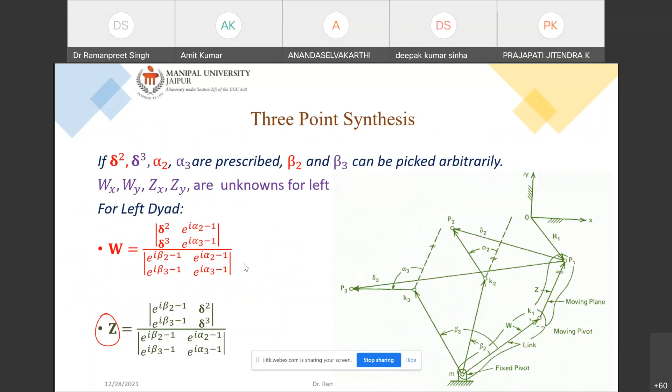So once you apply these formulas which we have obtained, for W and Z, you will get Wx and Wy, Zx and Zy, and then you can easily locate where your point A, point A naught, and point B naught are. All these things you can easily find out. Then you can do the analysis to check whether the point you are claiming is tracing the path or not.

Since this is your first point, this is your second point, and this is your third point, when you put all these values together, you will get a 4-bar mechanism like this. This is a 4-bar mechanism, and this is the coupler link.

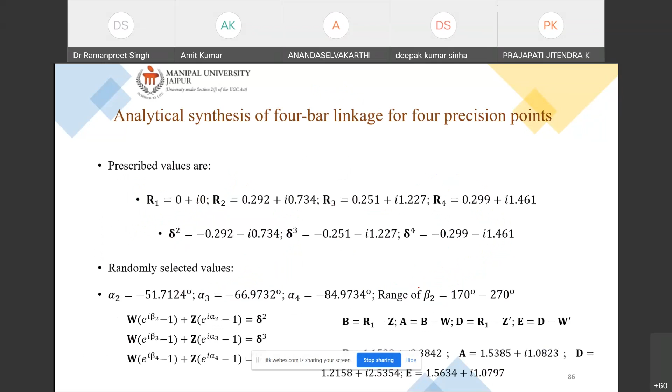Now, I think we'll stop here. If you guys have any doubt, you can ask. Else, still 5 minutes are there, but there is no point in taking any other topic because it requires more time. So we'll stop here instead of moving on to the other slides.

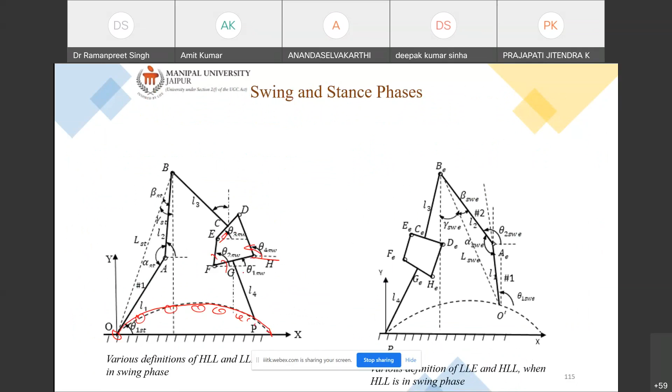So this is the thing. Suppose you are given with this, suppose this is the trajectory which is given to you. So considering this to be the given trajectory, you can find these angles. I hope I have understood the question correctly. You can determine these angles by doing the inverse kinematics, and you can have a mathematical model for that.

And if you want to have all these mathematical formulations, you can go to my Google Scholar profile and read these papers. This is the mathematical model for the different trajectories for the lower limb, stance phase and swing phase. Everything is there, so you can just check this paper and you will be good to go.